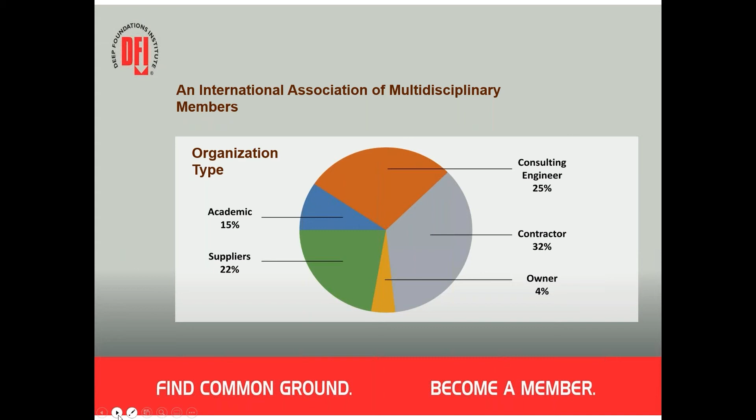So DFI has been a very important part of my career, and I would hope that you would check out the DFI, see what it has to offer if you're not already familiar with it.

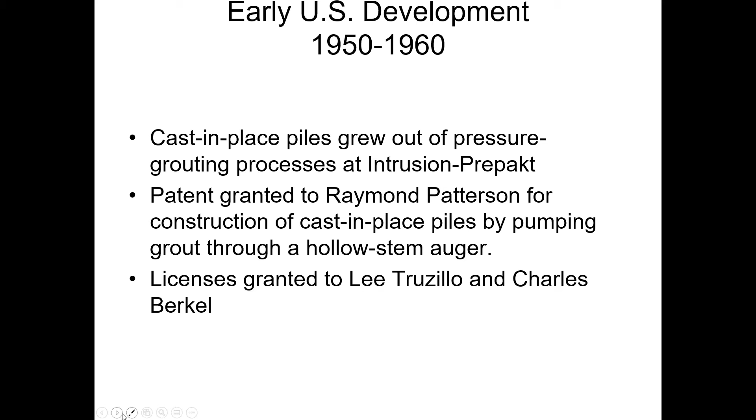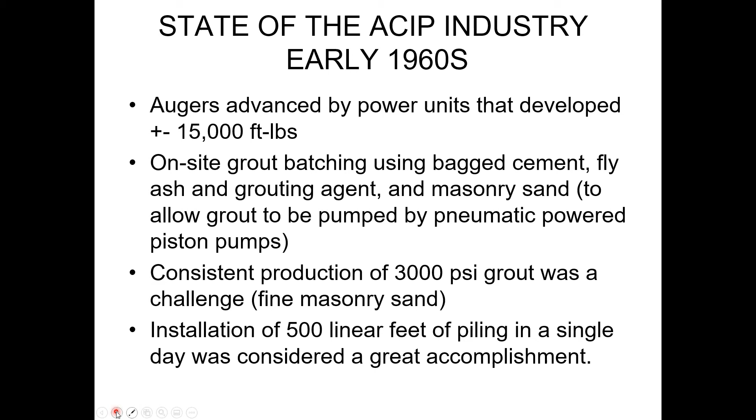In the early 1960s, the augers were advanced by power units that were, by today's standard, fairly anemic, 15,000 foot-pounds of torque. The grout used in the auger cast piles was batched using bag cement and fly ash and a grouting agent and masonry sand, much like you would see on a masonry project being done today. That was the way the grout was batched, and obviously using those processes and materials, it was difficult to produce a consistent 3,000 psi grout, and the installation of, say, 500 linear feet of piling in a single day was considered a significant accomplishment.

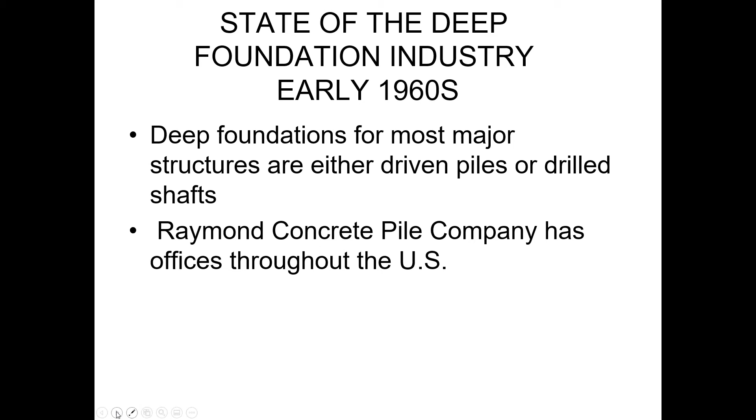In the 1960s, most of the deep foundations in the larger urban areas were either driven piles or drilled shafts. The driven pile side of the equation was largely controlled by either wooden piles, precast concrete piles, or Raymond concrete piles. Raymond step tapered piles at that time in the 1960s were a significant force in the deep foundations industry.

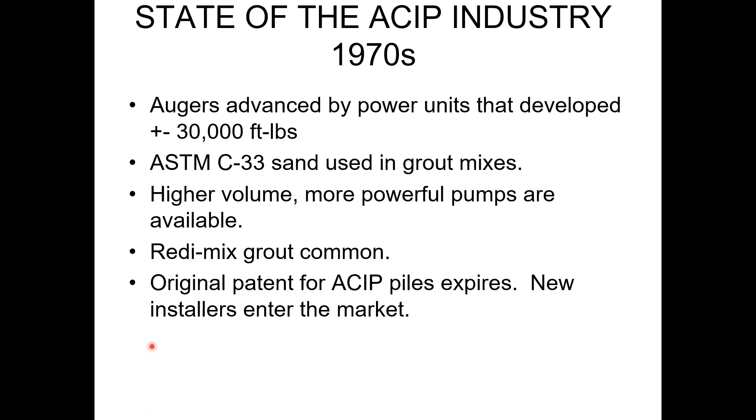By the 1970s, the augercast community had advanced in terms of the materials that were used and the equipment used to advance the augers. They were now up to the 30,000 foot-pound range. They had started using ASTM C33 sand in the grout mixes, which made it much more pumpable. There were higher volume, more powerful pumps available. Ready mix producers were now supplying a large amount of the grout used in these processes. And the original patent for cast in place piles expired, and a large number of new installers began to enter the market.

Looking at one urban area and the way foundations were approached in that area, and that is Atlanta, which lies in the Piedmont province. Again, you have Raymond step taper piles, which were normally driven through the residuum and seized up usually somewhere in the partially weathered rock, perhaps down on intact rock. Structures of significant size were normally placed on caissons, which were drilled through the residuum into the underlying rock to bear on intact rock.

At that time, auger cast in place piles normally stopped near the top of the partially weathered rock. So all the shaft resistance they got was pretty much in the residual soil.

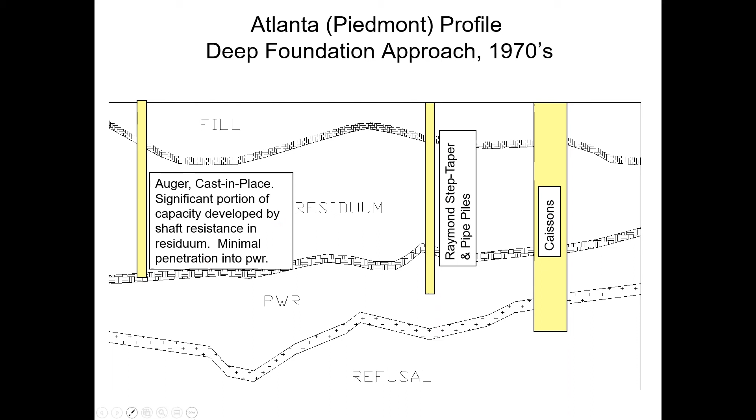All of that sort of changed as we moved into the 1980s. At that point, auger cast piles were pretty well known in the geotechnical community, and there was a continued advancement of the installation platforms and the grout delivery systems that led to application in a wider variety of geologic settings, and also application in intermediate geomaterials.

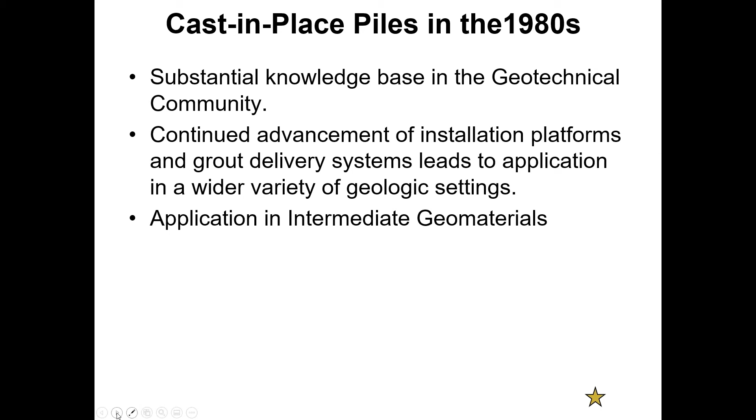And there are two projects that were really pivotal in the 1980s in terms of the development of auger cast in place piles. One of those was the Miami Rapid Transit System, with piles installed into soft limestone, and the Georgia World Congress Center in Atlanta, with piles installed into partially weathered rock. On both of these projects, conventional crane mounted auger cast in place pile tooling and processes were used.

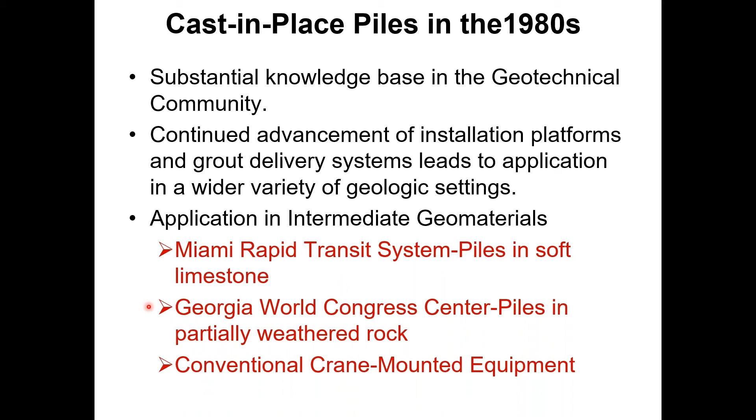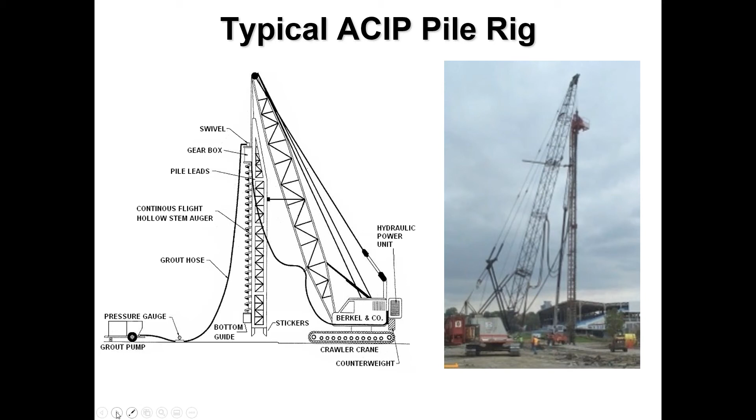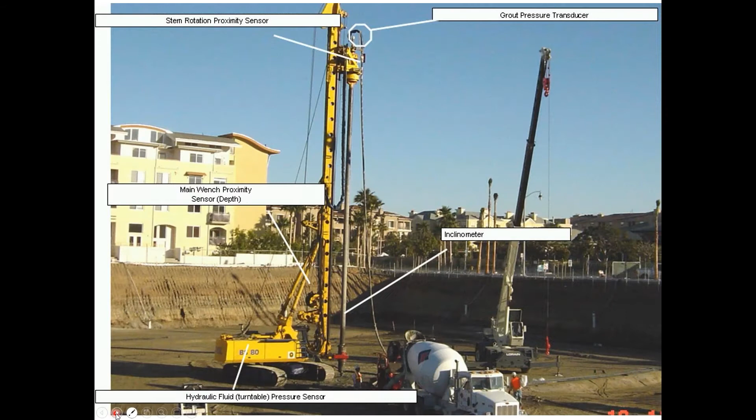And just another photo of a fairly large auger cast in place piling system that was used. In the early 90s, fixed mast platforms began to enter the scene, and they were, at least initially, primarily used for the installation of displacement piles, but very quickly got adapted for the installation of conventional auger piles. The fixed mast rigs, like the one shown here, were capable of developing significantly higher torque than the crane mounted systems that were being used at that time.

These installation platforms came from Europe, and because of the way the European piling systems were installed, there was a great deal of emphasis on gathering information during the drilling process. So there was a rotation proximity sensor, a main winch proximity sensor, an inclinometer that points to the tooling. The actual inclinometer is in the mast, and then a way to monitor the hydraulic fluid pressure of motors that were driving the turntables.

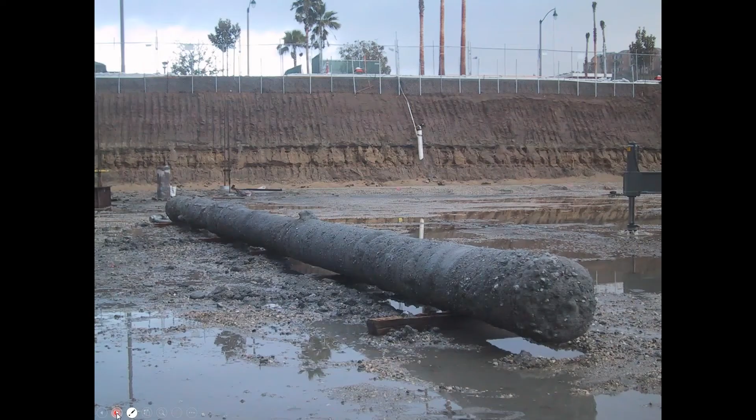So this installation platform, again, which was primarily imported from Europe, allowed a whole different set of parameters than the conventional crane mounted platforms. This particular photograph was taken at a site in Los Angeles County that was the redevelopment of the old Howard Hughes Airport area. And because it was the first cast in place pile system in Los Angeles County, we were required to extract a pile so that the building officials could look at it.

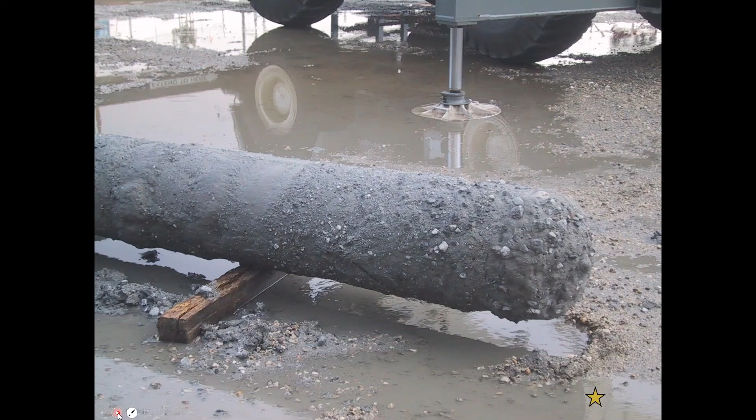And there it is. It took a significant amount of effort to get that pile out of the ground, and all the water you see is a result of the jetting that had to be done to get it out of the ground. Once it was out of the ground, it was kind of instructive, though, because you can see the material that was adjacent to the pile that's actually adhering to the pile, and it points out clearly one of the advantages of cast in place piles, and that is there is not a smooth interface between the pile and the soil. The pile actually becomes integrated into the soil.

And in this case, the upper part of the profile was a silty fine sand. The lower, approximately 3 feet, was a coarse sand and gravel, and you can see that material adhered to the pile. Again, these installation platforms had torque capacities much higher than conventional auger cast in place piles.

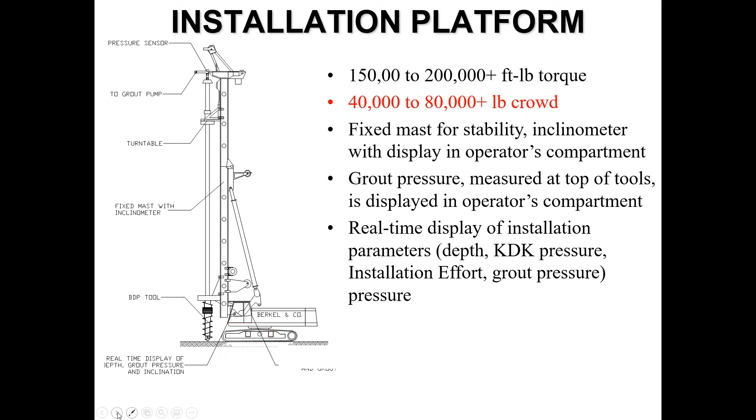These platforms are being improved almost daily. So the installation platform that's shown here is capable of producing 150,000 to 200,000 foot-pounds of torque. And a key element related to conventional auger piles mounted on crawler cranes is that they had the ability to exert a downward force or crowd on the tooling of 40 to 80,000 plus pounds. So a significant change from the conventional crawler crane mounted operations.

Again, these systems came from Europe, and they had an extensive data acquisition system associated with them, the ability to record time, depth, hydraulic fluid pressure, and rotations. And again, all of that was related back to the way cast in place piles were installed in Europe.

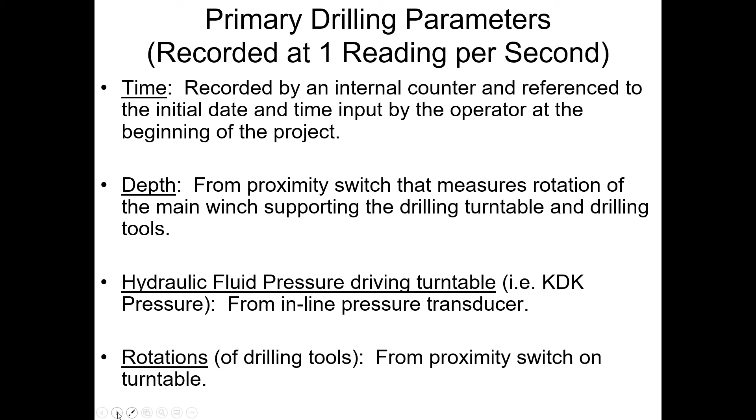The reason for going through the fixed mast systems is that for any given project where there is a consideration of going into intermediate geomaterials or very hard materials, there may be a consideration for using a fixed mast system as opposed to a crawler crane mounted system, simply because of the ability to exert crowd and in general turntables that develop significantly higher torques. With respect to that, there's some logistics considerations that need to be brought to mind.

So if you're looking at a project that you're concerned about being able to penetrate, and you think, okay, we need a fixed mast system for this because of the higher torque and the crowd, you may now also need to consider the logistics on the site of simply being able to get the tooling to the piling location.

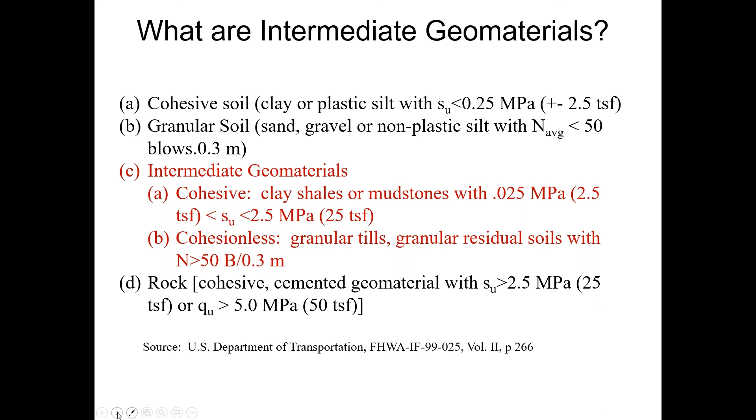Cohesionless materials: granular tills, granular residual soils with an N value in excess of 50 blows per foot. And I have found it useful to look at these materials in terms of this chart that was developed by Kulhawy and Phoon in 1993. I know that's old, but I still use it quite a bit.

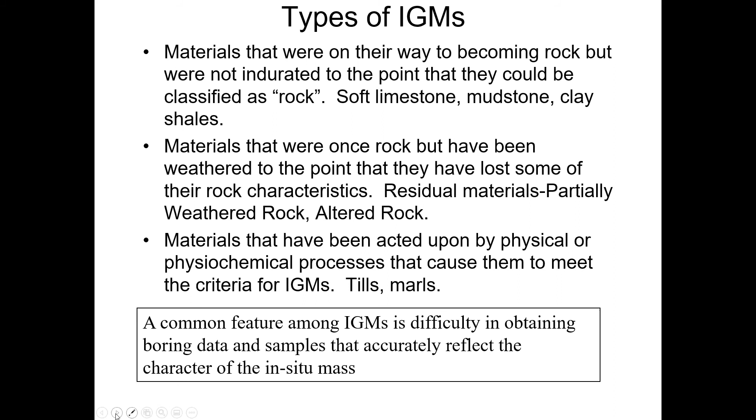And in the case of the Piedmont, we're able to get into partially weathered rock and basically go down to refusal, which would be considered intact rock. So why go to the trouble of getting through the partially weathered rock, or into the partially weathered rock?

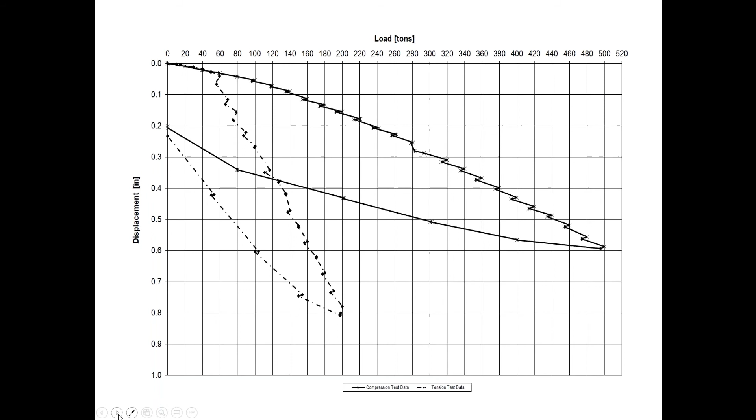Another area where a significant amount of work has been done, and I referenced the Miami Rapid Transit project that was done in the 1980s. In the Miami area, there are these alternating zones of oolitic limestone and sand. As it turns out, the deeper you go, the more higher consistency the oolitic limestone becomes.

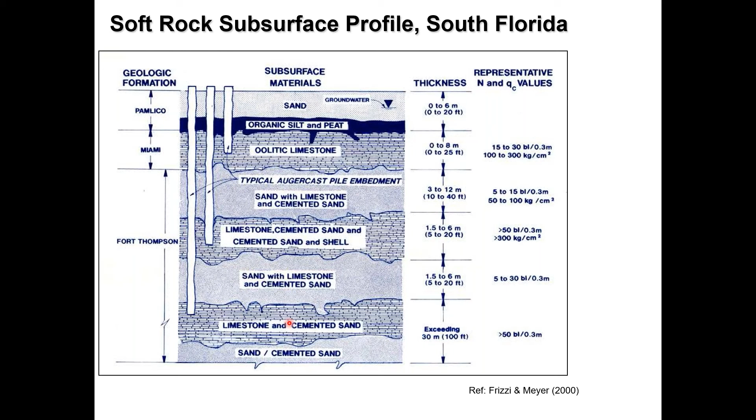But it's still in that intermediate geomaterial range because it's very, very difficult to get an intact sample to do an unconfined compressive test on. But this is because of the early success of the auger cast in place piles in the Miami Rapid Transit system and the tremendous growth of Miami. Auger cast in place piles have become a sort of the go-to system in the Miami area.

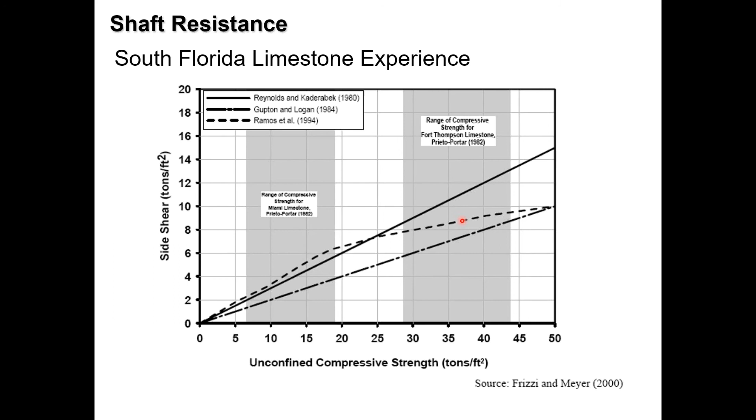As you move into the deeper Fort Thompson limestone, then you're looking at where unconfined compressive strength samples can be obtained in the 35 to 40 tons per square foot range, and side shear values of 8 to 10 tons per square foot. So kind of moving up the food chain in terms of the kind of shaft resistance that can be developed.

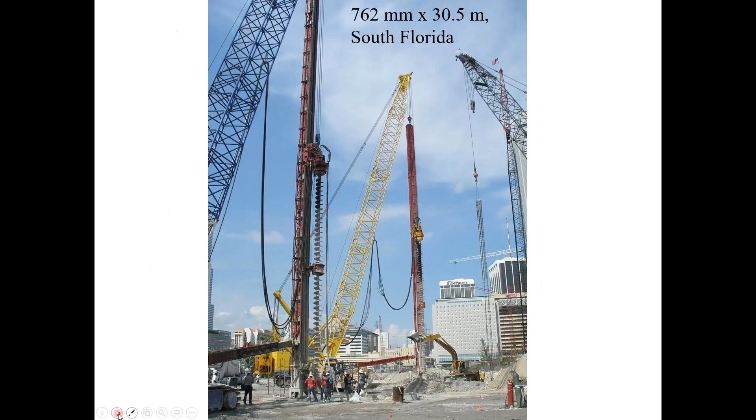Just a couple of photos from that project, and I wanted to point out this is a conventional crane mounted auger cast in place pile rig. That turntable is a conventional one, but the contractor in this case got a little cute, and that turntable is one that was extracted from one of the European fixed mast rigs, which could develop significantly higher torque than that one. So you got to give it to the contractors, they're always out there thinking and looking at how they can do things better.

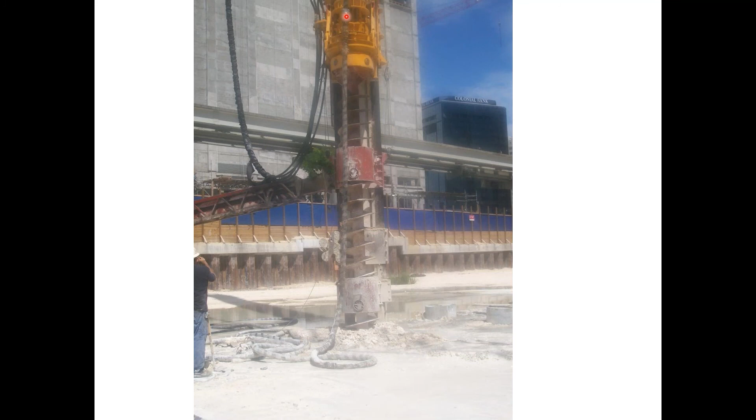Just a shot of that, the turntable and the rig and the kind of material that's coming out. It's pretty much, it's quite often a white dust, or if you reach down and grab a handful of this, it would be just some chalky looking gravel. But again, capable of developing some significant side resistance.

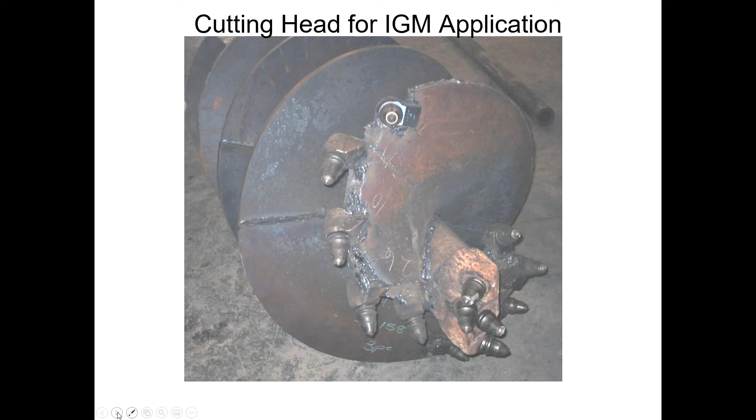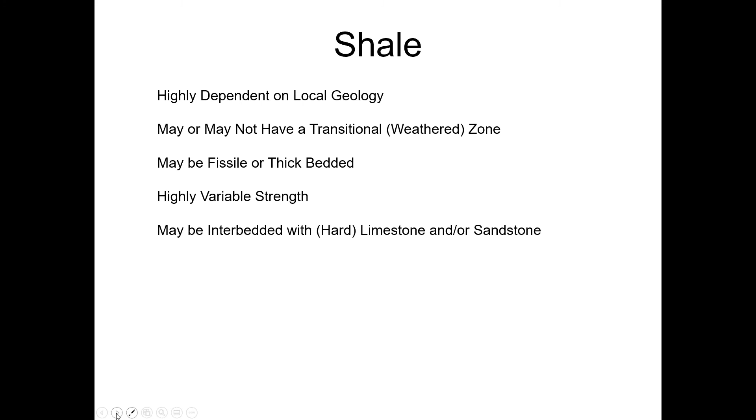I know that's not very helpful from the standpoint of how you're going to attack it, but that's just the reality of the situation. There may be information available from drilled shaft operations in terms of shaft resistance and drillability, but shales are a bit tricky from an intermediate geomaterial standpoint.

A good place to start in evaluating shales is GEC8, and the section on shales is based on a 2005 paper by Vipulamamdan, who would ask that you call him VIP, but it was a load test funded by the Texas Department of Transportation, where they had 8 piles socketed into clay shale.

Look at the unconfined compressive strength values from 1 to 30 TSF, a pretty wide range. But the good thing about this method is it looks at capacity in terms of pile head displacement. In other words, you plug in the parameters you have in terms of unconfined compressive strength, and you select a pile head movement, and out of this process, described in detail in GEC8, you get a working capacity. So maybe it helps bring some clarity to the shale side of this intermediate geomaterial process.

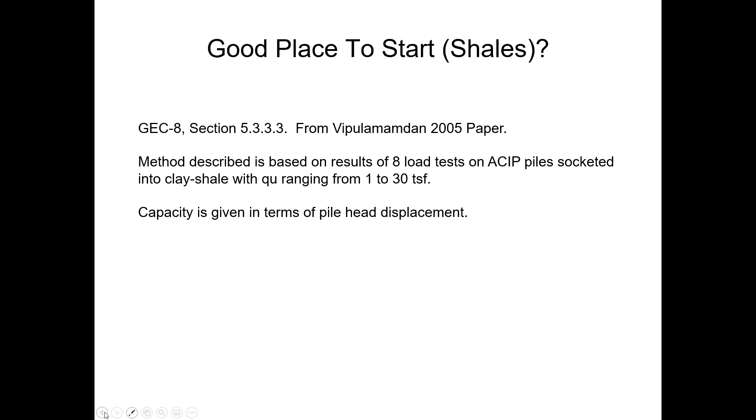I think we have another question on that Philly test. Was the load test installed and tested at the basement level? I know the basement was okay. Yes, everything was excavated down to that basement level, and that's where the test pile was installed from.

Another question: how should conventional pile capacity models be modified to account for this type of pile for more accurate predictions? That's an interesting question, Russ. I would direct you again to Federal Highway Geotechnical Engineering Circular number 8, which was worked on from, I don't know, 2000, 2001, up until the time it was published in 2008.

It involved a strenuous study of U.S. auger cast in place systems and European cast in place systems, and they tried to integrate some of the better processes of both systems into recommendations. But the capacity analysis processes described in GEC8 for cohesive, non-cohesive, intermediate geomaterials, and displacement piles are, I think, the best source of reference for pile capacity analysis.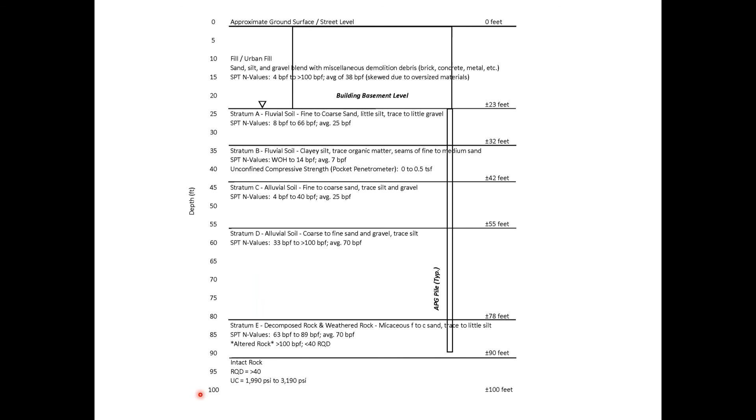Thank you. Next one we had was: how has your project load test compared with the Kulhawy and Phoon chart? Well, let's take a look at this slide right here.

We believe that Piedmont partially weathered rock or Piedmont altered rock operates in the general range of 2.5 tons per square foot in terms of load transfer for shaft resistance. And this piece of data from the 500 Walnut Street, if you look at the lower 14 feet, the implied load transfer is 2.65 tons per square foot.

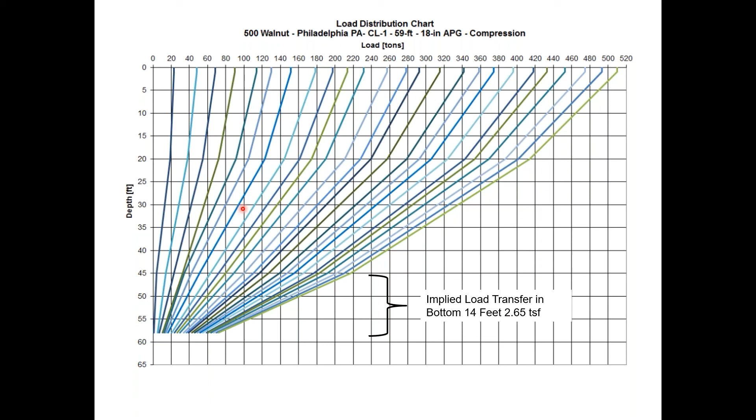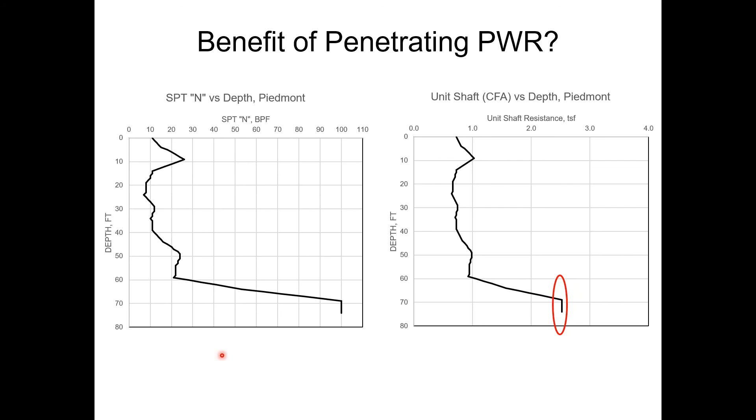And the chart I showed earlier from the Atlanta Piedmont area comes in at about 2.5 tons per square foot. So that's pretty consistent. And if you look at the Kulhawy and Phoon chart, it sort of makes sense — we're looking at the Piedmont coming in at 2 to 2.5 tons per square foot.

The limestone in the Miami area is again up the food chain a bit, operating more up to 8, perhaps 10 tons per square foot. So if you look at the material we're talking about, intermediate geomaterials, something between hard soil and soft rock, to me it makes perfect sense, which is why I use this Kulhawy and Phoon chart so religiously. The materials we're talking about fall really in the range where they are supposed to be, based on this chart.

Thanks, Willie. All right, we had another question here. For the fixed mast rig, you showed the reach of about 2 meters. For greater distance, is it common to walk the rig over the piles already constructed?